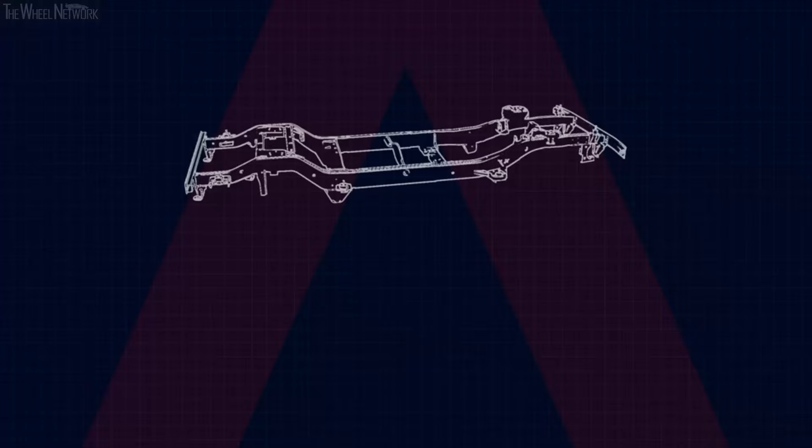Ineos say they're building the Grenadier using a classic 4x4 blueprint, so for them there was only one type of chassis to choose. A ladder frame is the only way to build a proper off-road 4x4. Ladder frames have been the basis for some of the most iconic off-roaders for over 70 years, starting with the Willys Jeep. So you could ask, why would Ineos use anything else?

We are not using a monocoque because we are not building an SUV. Strong, stiff, rugged and reliable, ready for mud, sand, rock and snow, and ideal for attaching extra equipment like heavy-duty underbody protection or winches, and anything else you need in the field. Well, that's the plan.

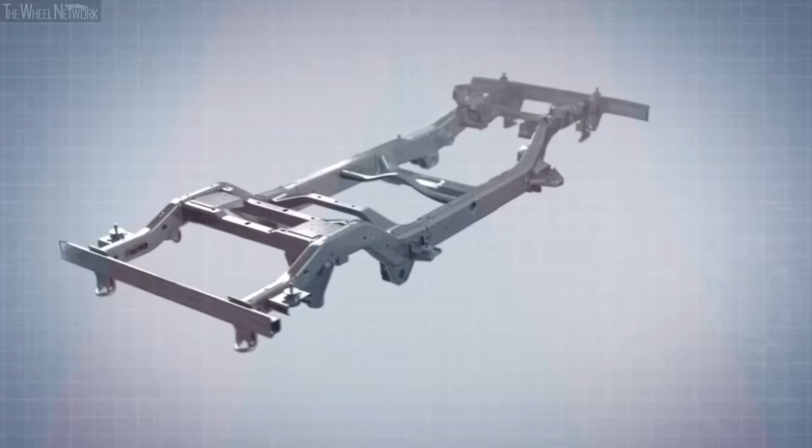Ineos is creating the ladder frame in partnership with a highly experienced vehicle manufacturing company that has a proven pedigree of making ladder frames that can tackle the toughest environments. So the engineers are in no doubt at all: the Grenadier's skeleton will be a box section ladder frame.

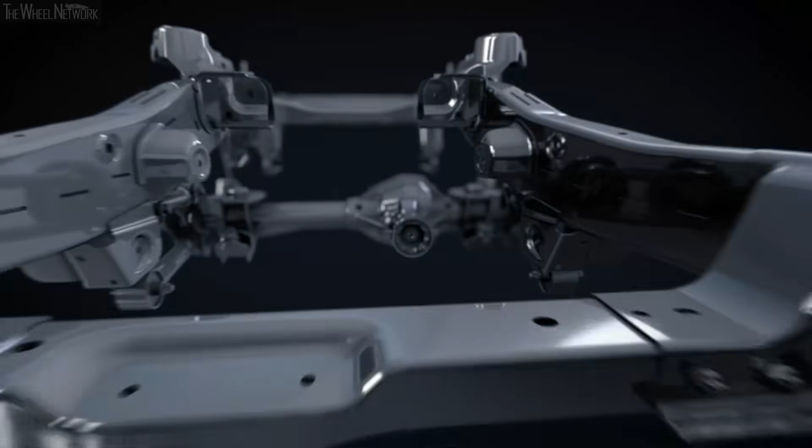Now they'll happily give you a whole load of science and stats to explain why, but for mere mortals like us, the bottom line is absolutely clear: the ladder frame is super strong and a really well-proven 4x4 platform that over decades has helped aid organisations, conservationists, explorers, foresters and of course farmers work harder.

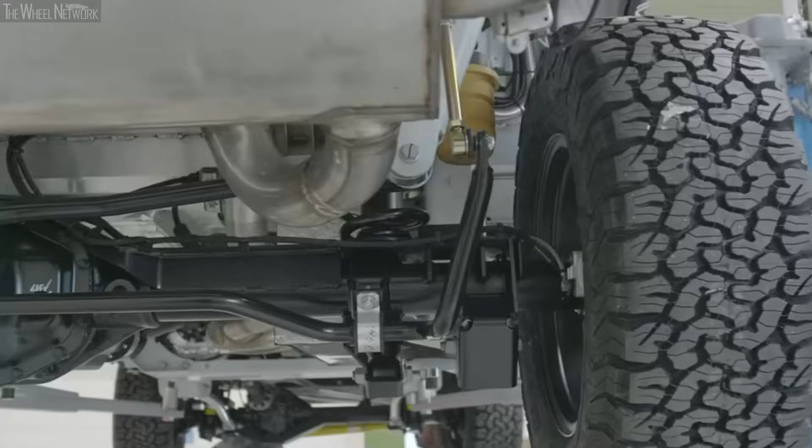For a 4x4 to get the job done, no matter how punishing the conditions, the Grenadier engineers feel that beam axles front and rear are essential. Beam axle is the most robust design we can provide for this vehicle.

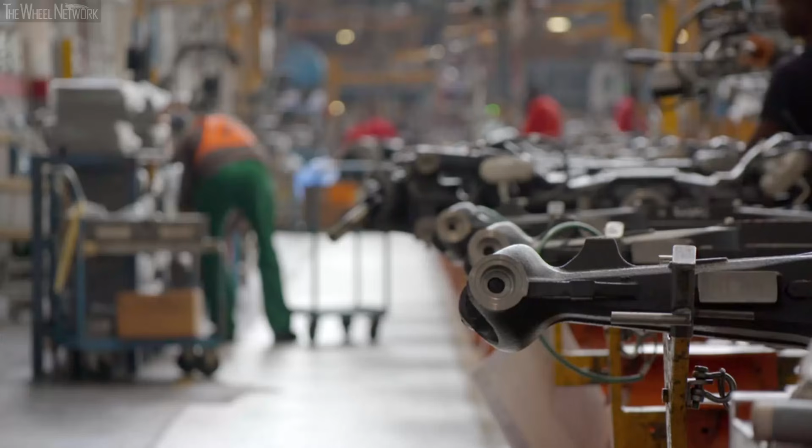Ineos looked long and hard for the right supplier for the Grenadier's axles. They chose Carraro. Why? Because of their long history building tough four-wheel drive vehicles, including tractors, making them the perfect fit for the Grenadier. As you can imagine, there's been a whole lot of debate about whether the Grenadier should have independent suspension or beam axles.

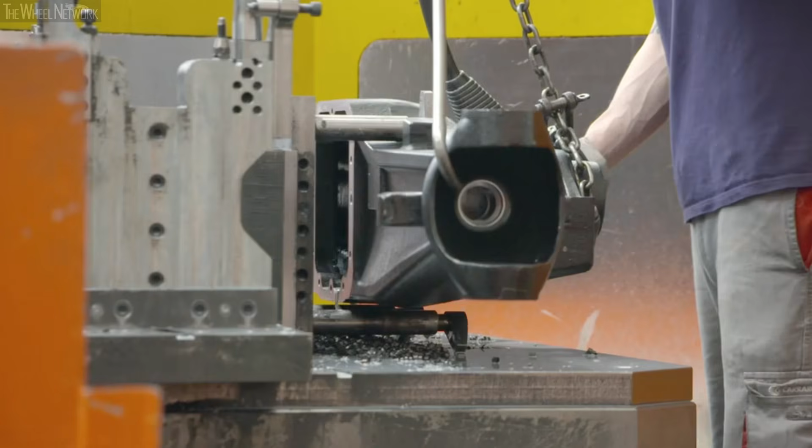Now, both setups, of course, have their pros and cons, but on balance, the engineers have decided that beam axles are going to be more robust, less vulnerable to damage, and ultimately much more likely to keep you going when the going gets tough.

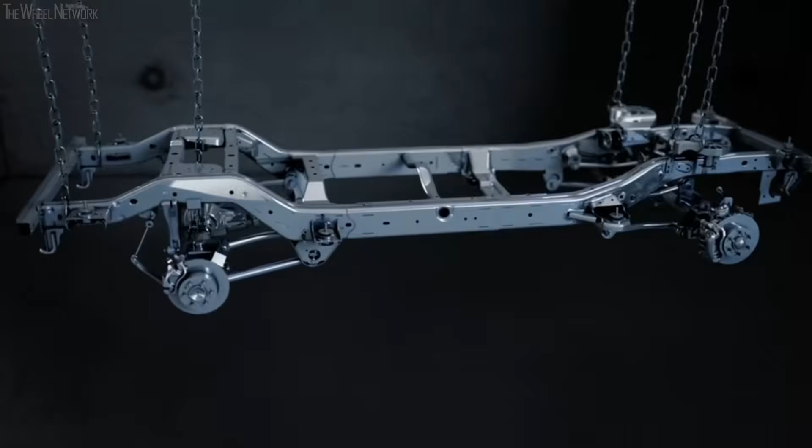Beam axles front and rear and a box section ladder frame - Ineos's vision for a no-compromise foundation to their ultimate 4x4. So the ambition is clear. They're starting with a blank sheet of paper. The Grenadier is being designed and built from the ground up, every component chosen by engineers at the top of their game, and that's got to be very good news.

Join me next time when I'll be trying to find out more about the suspension setup.

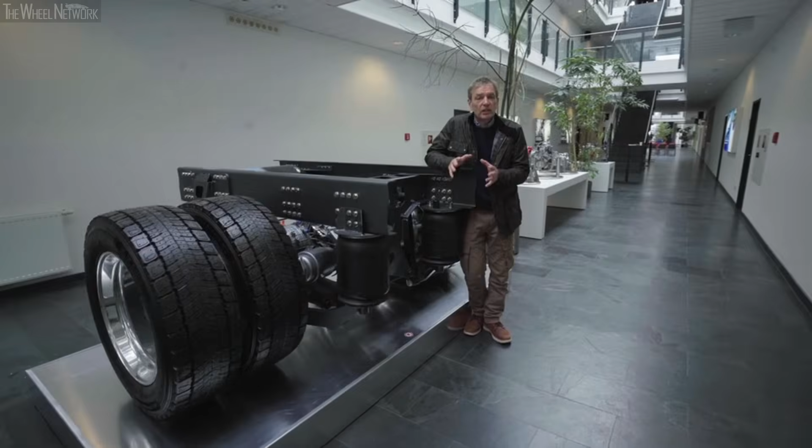The much talked about Ineos Grenadier is on its way, and I'm continuing my journey behind the scenes to find out exactly what the engineers are up to. Ineos has pulled together an international team of specialists to bring the Grenadier to life. There are around 60 companies already involved, and one of the key players is based here in Austria.

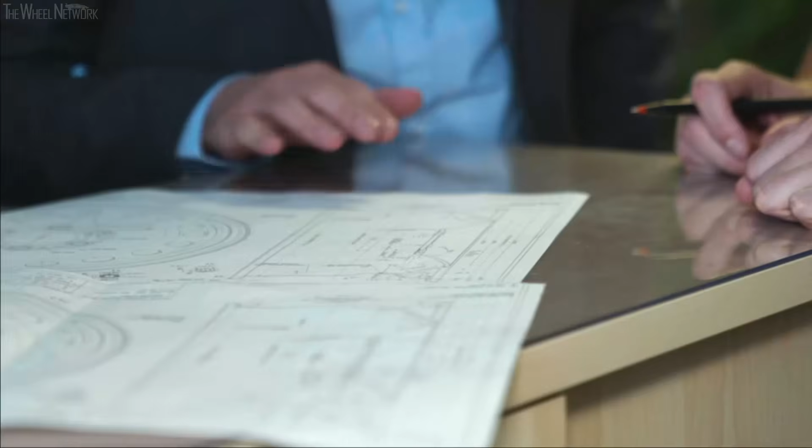Tractors, trucks, 4x4s - Magna has over a century of experience developing and building some of the world's toughest off-road vehicles. A good fit for this ambitious project. It feels like there's a bit of a Grenadier takeover here. There are around 100 engineers working on the project and 15 in this design office, focused on creating a suspension

setup that meets the needs of people who use their 4x4s for work every day. People like Billy Milne, putting in the hard yards, looking after a large estate in the wilds of Scotland. The terrain is tough, punishing, challenging all year round.

So Billy knows exactly what he wants. An ideal 4x4 should be fit for purpose. It should be able to go where you want to put it, and it's got to have a good suspension system that rides through everything that's given. You want something basic, well set up, that does the job.

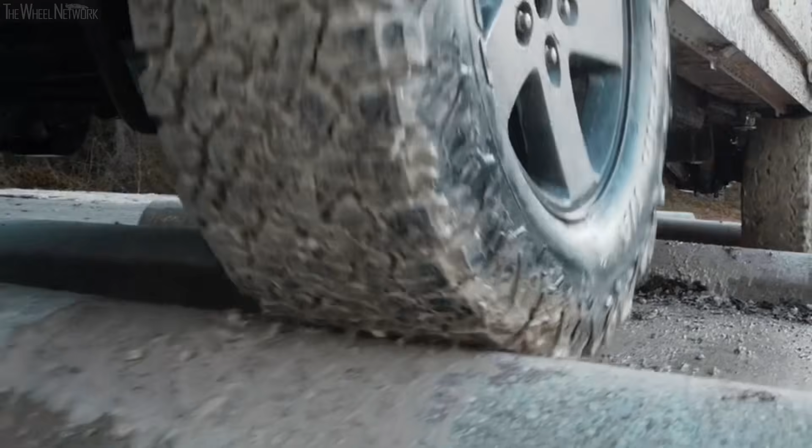So there's a big expectation here: the best possible ground clearance, constant traction, and high axle articulation and suspension travel. So how are the engineers at Magna creating the ultimate 4x4 suspension?

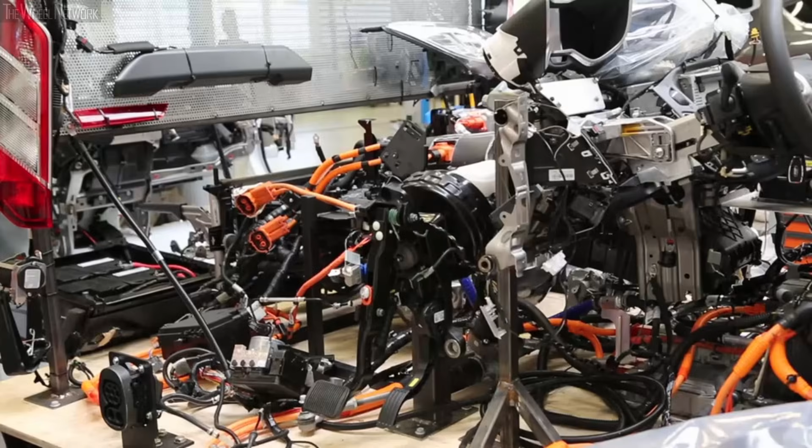By taking apart the world's most renowned off-roaders and benchmarking them, exploring three main options: leaf spring, coil spring, or airbag, then using CAD to develop a theoretical new model that combines the best engineering ingredients to create something even better. Their conclusion? There was only one way to go, it seems: coils and heavy-duty dampers.

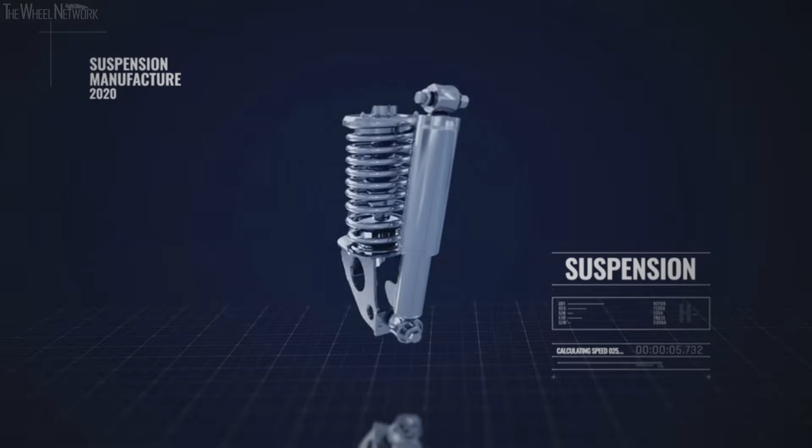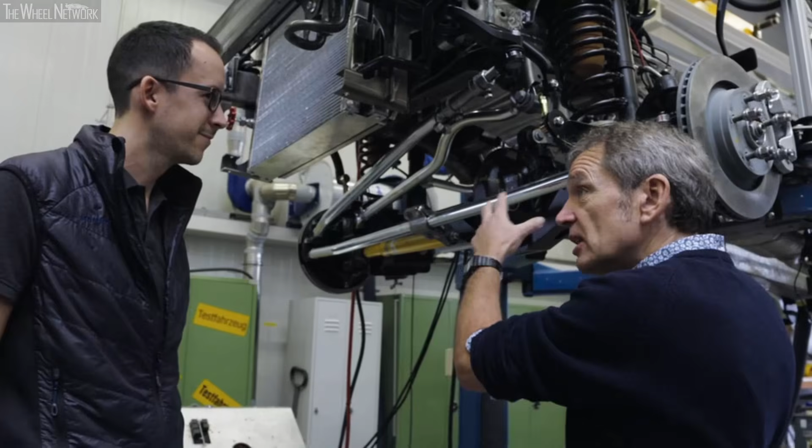I met up with Magna engineer Matthias Mayer to find out more and get an exclusive look inside their top-secret workshop. It's brilliant to see the suspension actually bolted to a chassis, and this is the Grenadier chassis now. It's impressive, really impressive.

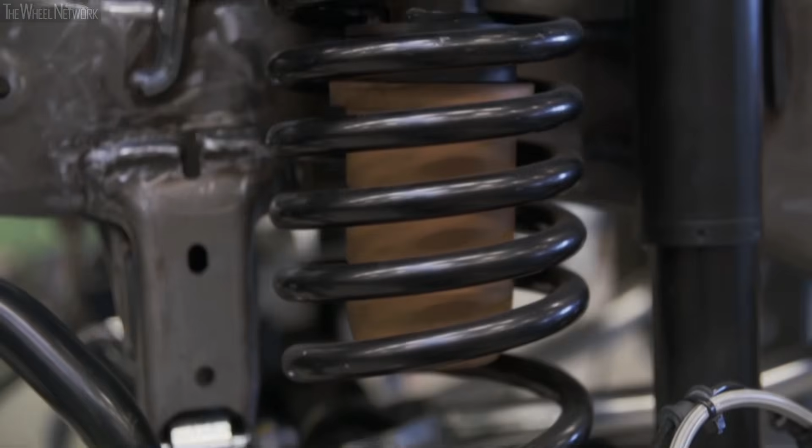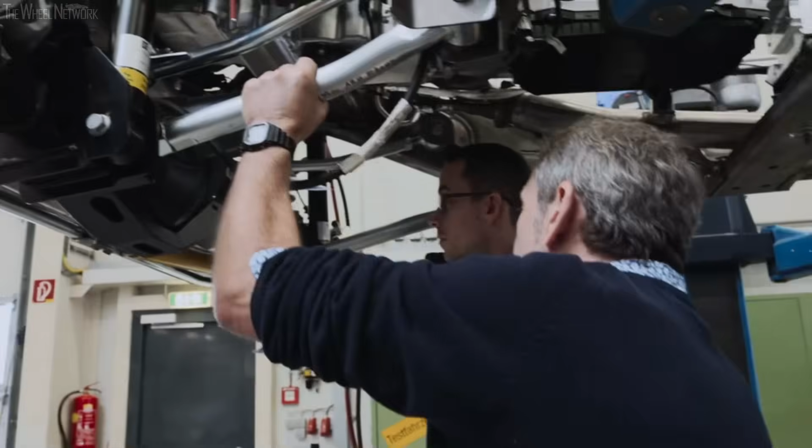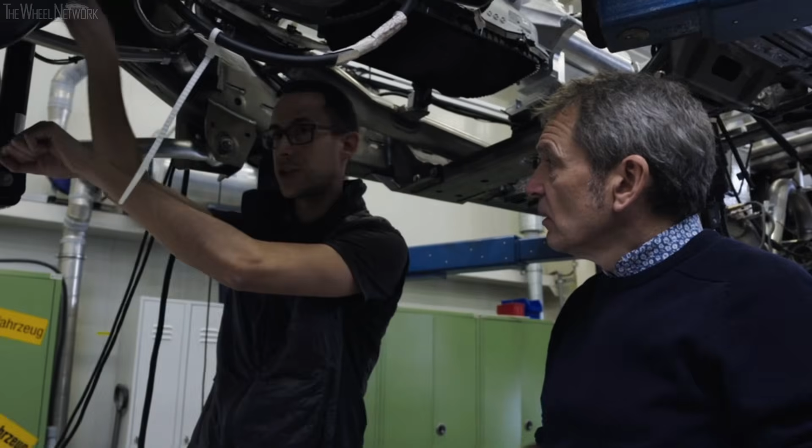You've clearly gone with coil springs here. Why? Coil spring is, in our view, the best option for this vehicle because we can have a progressive spring curve. This means the stiffness of the spring changes depending on the load. Add separate dampers and huge energy-absorbing bump stops, and the engineers believe they've created a unique package. So underneath, two really hefty big bottom links, and then two slightly smaller top links. That's right. This gives stability against rotation in this direction for brake torque and so on, and also good stability during driving.

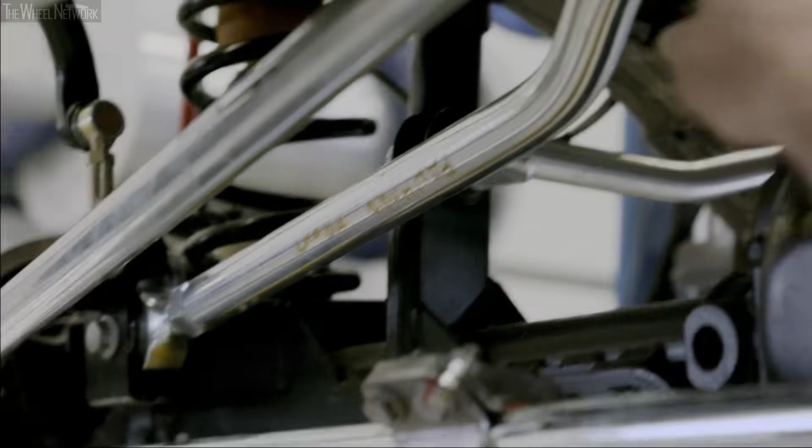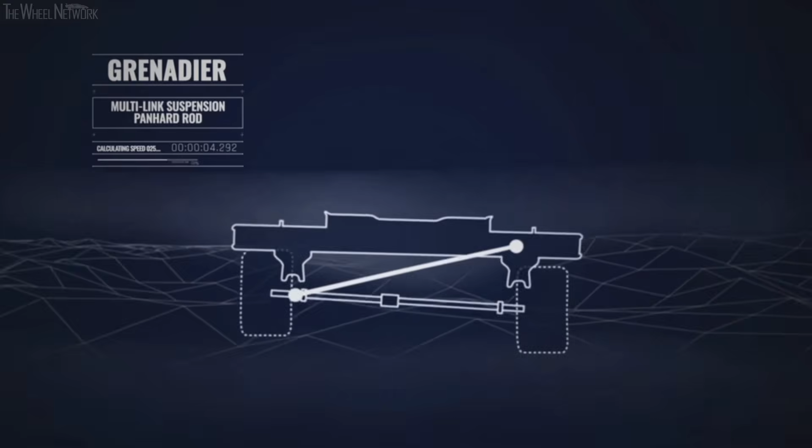These four really strong links help stop the whole axle twisting or moving forwards and backwards. Back in the front then, we've got one link here, the panhard rod. It goes from the chassis over here to the axle, and its purpose is guidance in the lateral direction, to stop the whole axle moving from side to side. It has to be strong because more or less the whole axle load in the lateral direction is guided by this link. So this has to be massive.

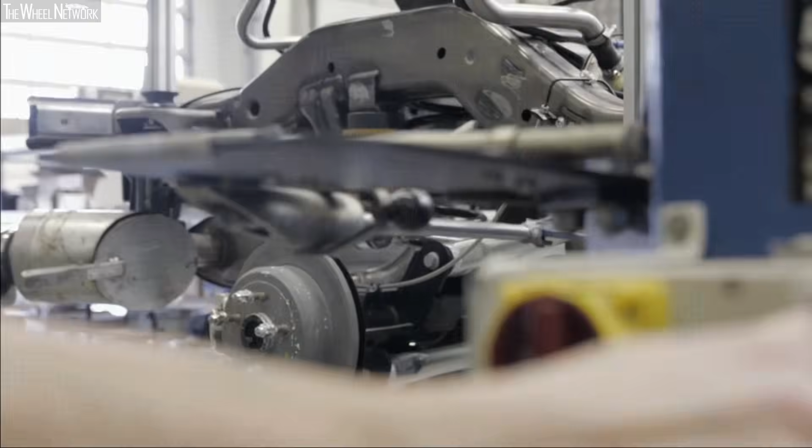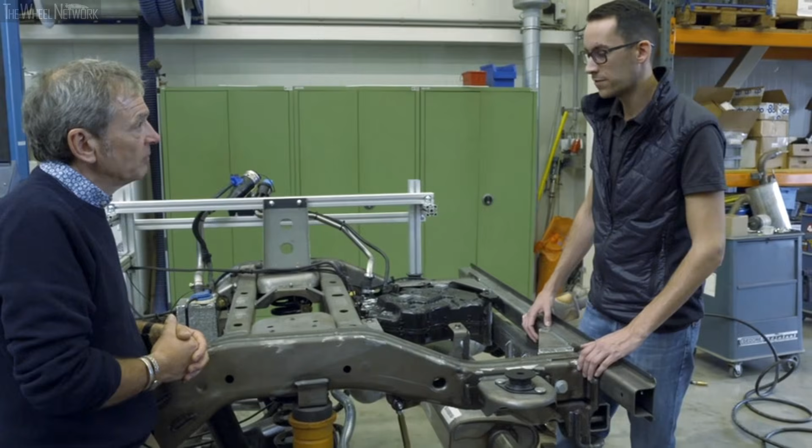And it's the same setup at the back. Where have you got to now in terms of developing the final suspension for Grenadier? We have a great prototype setting now. We have real great ground clearance, very high distortion angles on the axle itself. This enables good traction on every off-road terrain you can think of. And of course we have real high wheel travel, which enables good drivability even in empty condition and also with a trailer on it.

There's no electronic control on this at all, no wires anywhere. Yeah, it's completely free of electric components, to be robust, easy to maintain, and also to have easy access to all parts.

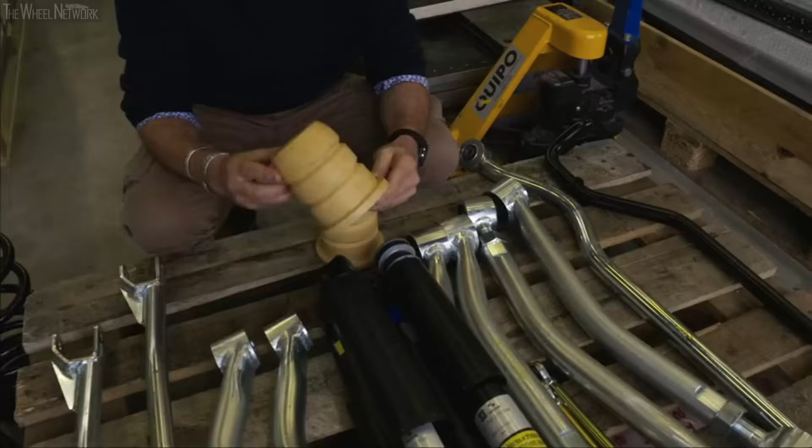After months of only being able to look at computer-generated models of the suspension, it is so cool to finally be able to touch some real parts. But these are prototypes, of course. There's a whole heap of testing and fine-tuning to go. There's a bloke in Scotland I know who will be desperate to get his hands on this stuff and show it a bit of good old-fashioned Highland hospitality.

Hopefully they will get it right. And if they listen to the people out there that are working the ground, working the land, and need a good rugged 4x4, I hope they get it right.

I hear you, Billy. Clearly building a rugged 4x4 is a huge challenge, but getting it right is exactly what Ineos are focusing on. That's why they've got the best people working on it, and I have to say, their confidence is impressive. I promised you exclusive access behind closed doors. Well, there you go, you're the only people who've seen that. That's it for episode 2 of Building the Grenadier. Join me next time to find out more about the engineering of this radical new 4x4.

I catch up remotely with some of Ineos Automotive's senior management team to find out how they're handling the coronavirus challenge.

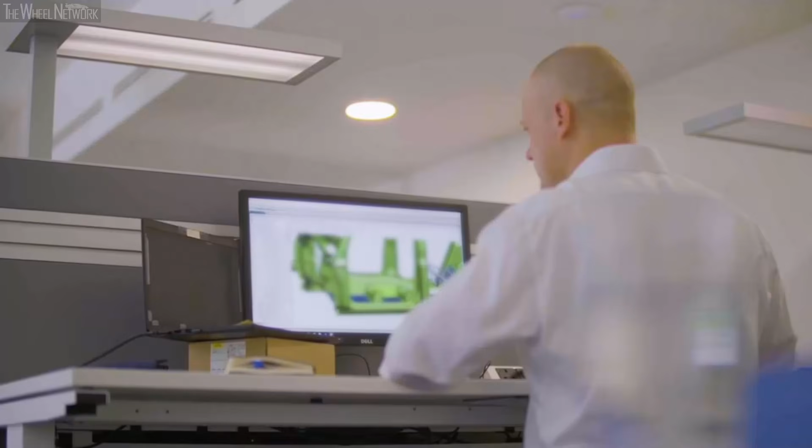Can you give me any examples of where it's been tricky? Every shape that's created on the front or the rear of the vehicle must respect the approach and departure angle. Otherwise, as you quite rightly said, people will not see this as fit for function.

Essentially, the Grenadier's base is going to be in Wales. Why Wales? Well, we wanted to be able to create our own identity. What we wanted to do was have our own facility. We didn't want to take somebody else's. We wanted to create something specific.

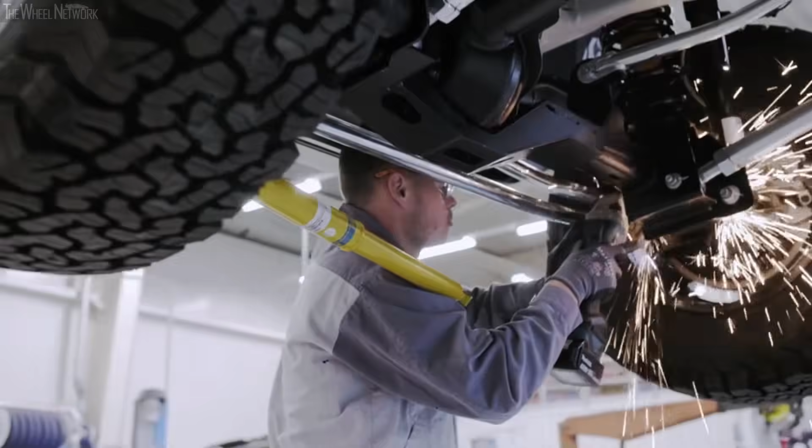Oliver, it's great to see you. What are the really big challenges to conquer from your point of view? You have the digital engineering done, but now you have to actually put it in the physical world, and this is ahead of us. Dirk, thank you very much for finding some time to speak to me.

I know you're a very busy man. So what stage are we at now? Coming out of COVID, coming out of that crisis, we have lost some time here and we need to make it up. We are not jeopardizing the quality, so we need to find ways of testing very hard, very rigorously.

Welcome to a very special edition of Building the Grenadier. After all the talk, all the speculation and all the planning, Ineos Automotive is finally prepared to let us see the exterior of their all-new 4x4. So, here you go.

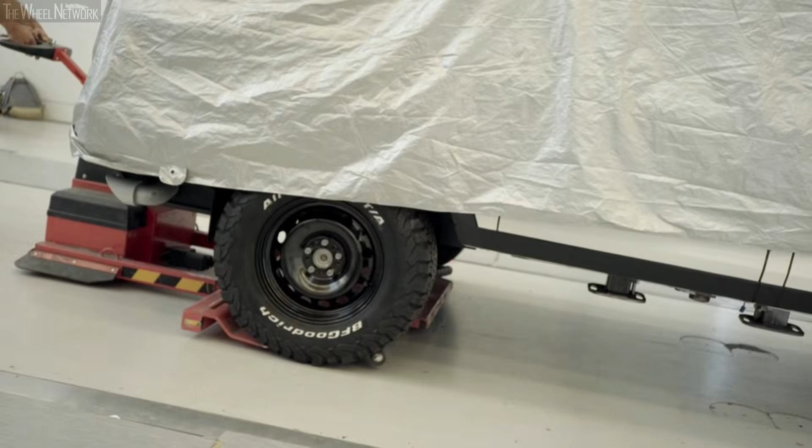Revealing the finished look of the car so early in its development, most manufacturers wouldn't dare do that. I think because we're not really restrained in the way that a big manufacturer would. We don't have to protect an ongoing line of vehicles. The view is that we just need to be really open about it. We'd much rather get the actual car out there, test it. Like to be nice and open.

Why wouldn't you be? The story about a pub in London, the Grenadier, a bunch of blokes having a few beers and coming up with this plan to build the ultimate off-roader - is that really what happened, or was it a much more conventional brief? It pretty much was exactly that.

It seemed that the sort of last of the proper utility vehicles were about to stop. There was a character about them that we all kind of felt we were going to miss, and you look around and there was nothing that was really very appealing, and Jim being Jim, let's do something about it. As we basically worked out what it was about the character of these older vehicles, what was the DNA that gave it that character, and as we understood more, you start to see why these vehicles start to look in the way that they do. We didn't set out to make it look like anything else. It was always sort of engineering led.

Function always wins. Where did your influences come from in the way you creatively thought about the design? Right at the beginning, I remember saying, we've got to design something super practical, really well built. If we can think of it in these terms now, all the rest of it gets kind of built onto there.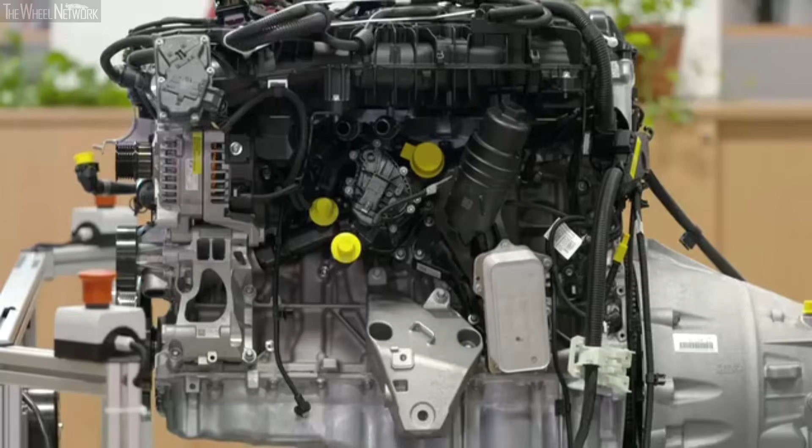In the last episode, you got to see what the Grenadier will eventually look like. Well, now's your chance to hear it and to see it undergoing some of its preliminary testing. I'm back in Austria to catch up with the engineers responsible for developing and testing the Grenadier's powertrain. And that is actually a lot steeper than it looks.

Early prototype Grenadiers called 2As are being used to specially calibrate petrol and diesel variants of the same BMW 3-litre 6-cylinder engine. The tuning and testing programme is being led by engineer George Fuchs.

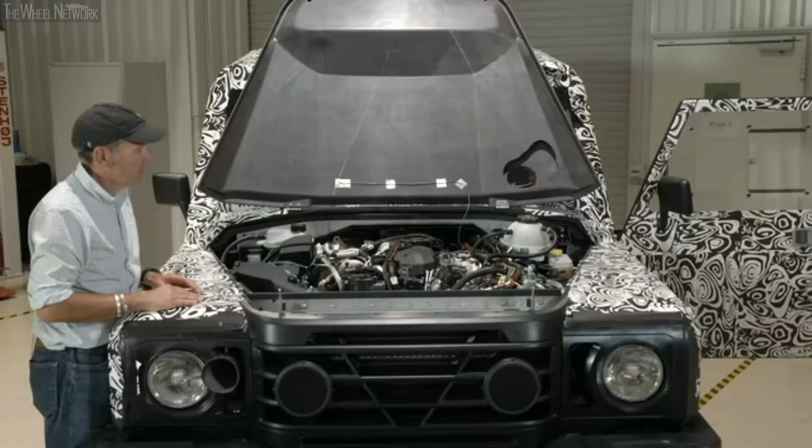That's cool, it sounds really smooth though. So the two engine options are going to be what, just to clarify? Here you can see the diesel version, and before on the test track you have seen the petrol version. Both are 3-litre versions with 6 straight cylinders.

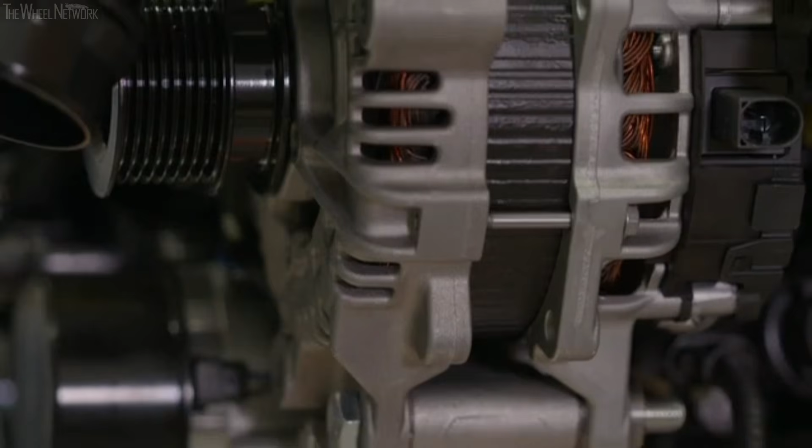Why take an existing engine that's being used for a different purpose off the shelf and modify it, rather than just build a brand new engine from scratch? We know we can count on the BMW one. We fulfill all emission standards on every market. We know we can adapt this engine for the use of the Grenadier project. The most important thing is to have a high amount of torque at low engine revs. We need a robust engine, and we need an engine we can count on, because we need to be flexible and have a high amount of torque and power, to be able to bring up the vehicle, also with a trailer, for example, up the hill.

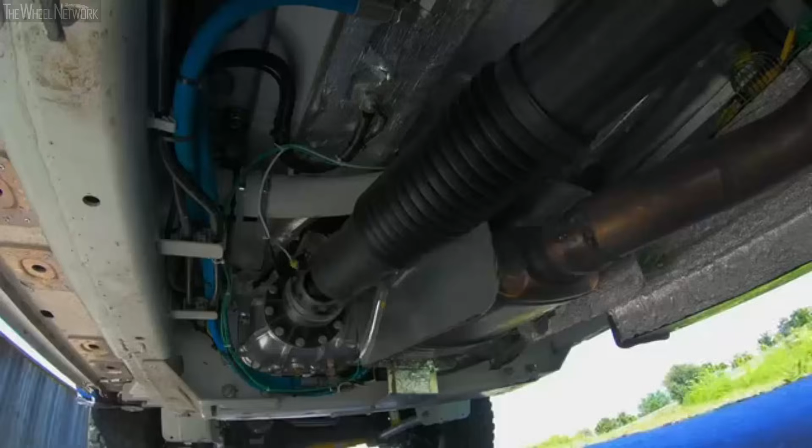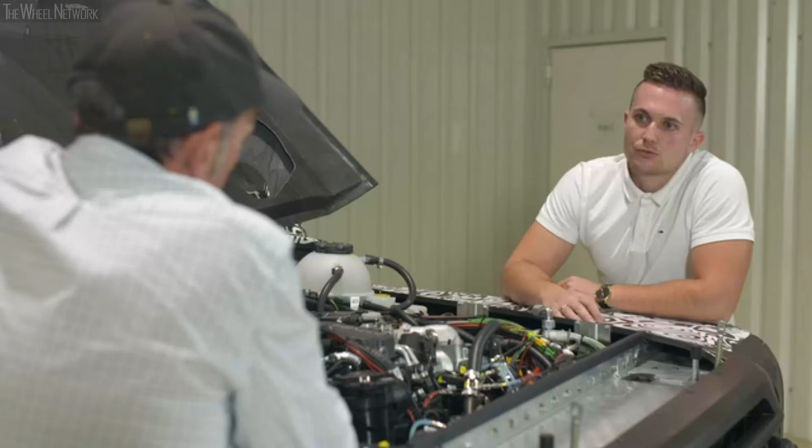How hard is it retuning, recalibrating either a diesel or petrol version of this to make it the right engine for Grenadier? We need 2 to 3 years of calibration activities. So we have several loops, winter testing, several loops in hot climate testing, emission testing and so on.

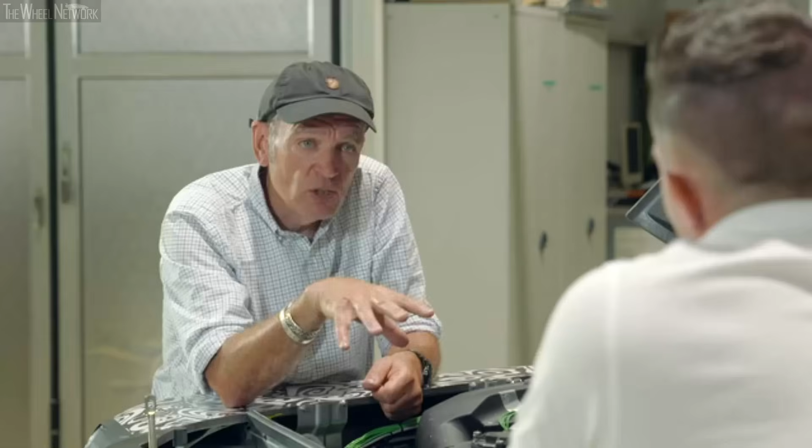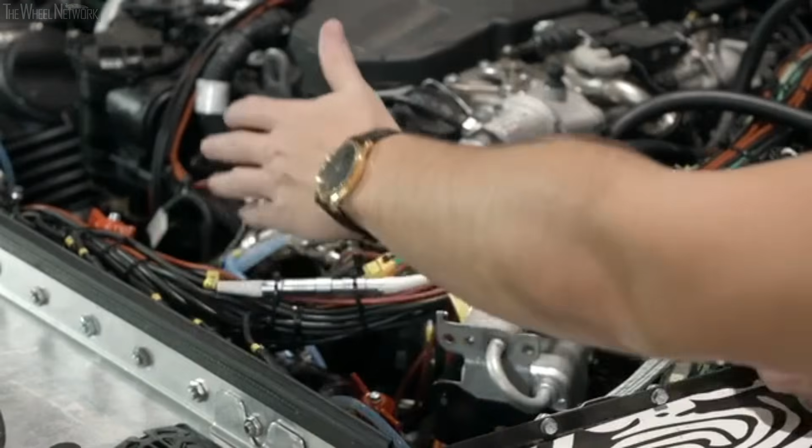So in terms of calibration then, what are you actually fiddling with and changing? It's a mix of all components which are relevant for the engine, the air intake system, cooling temperature, fuel supply, the exhaust system. Here you can see in front, these are approximately 12 pressure sensors which are measuring the pressure in the fuel supply, in the cooling system and so on.

So you guys have already done extensive testing, 18 months or so. How much more have you got to do? Approximately 1 year is left, and in total we will travel 1.8 million kilometers. That's a lot of testing. Yeah.

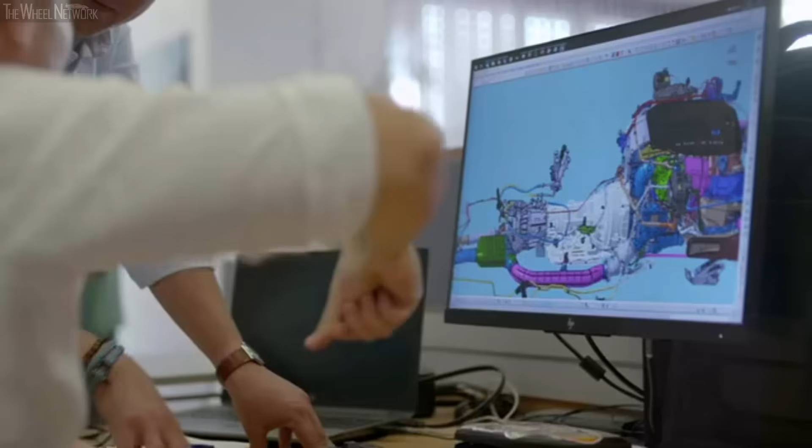Ineos Automotive is working with off-road engineering giant Magna to develop not only the Grenadier's engine options but also its heavy-duty transmission. Its facilities here in Austria are world-renowned. The gearbox programme is being led by Ineos engineer Joop Zwollo.

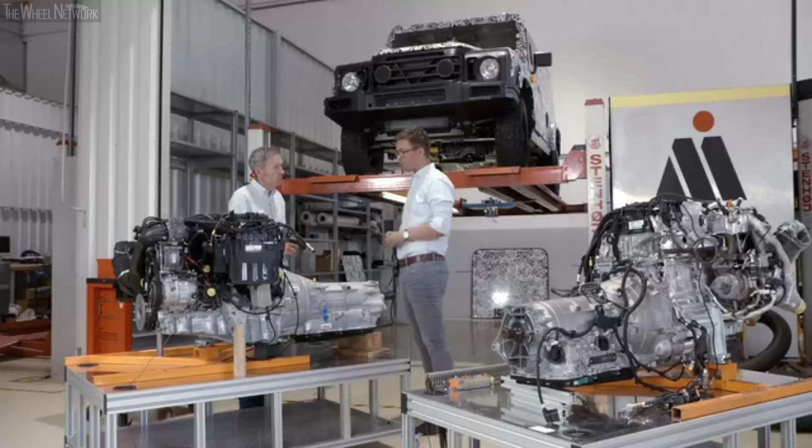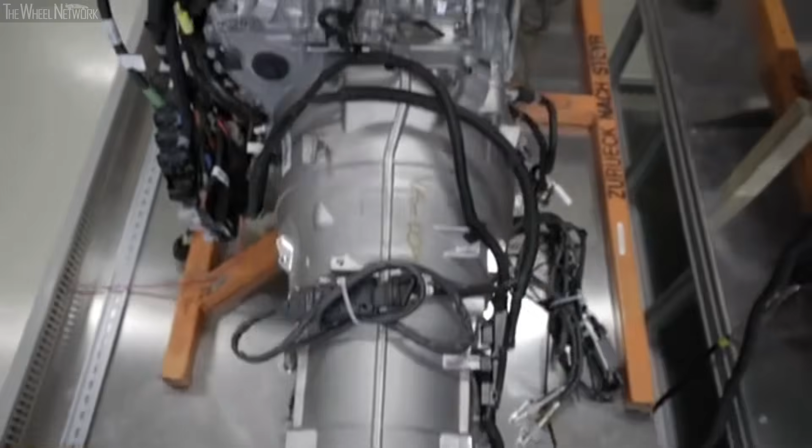I'm keen to find out firsthand how things are going, and there's a burning question that needs a straight answer. Will there be a manual option? No. Why not? We've reviewed all the options and we believe that the Auto is the best option. It offers the full suite of functionality for the experienced drivers but also for the inexperienced drivers. These are both a ZF 8HP, 8-speed automatic transmission with torque converter, fully electronic control, best in class, definitely.

And in terms of the features in it that make it better for off-road use, for the kind of customers who are going to end up driving these vehicles? Oh, definitely. It has a torque converter which prevents stall, increases torque. There's a manual mode for the enthusiasts to select their gear and keep that gear, or keep it in drive for the inexperienced drivers.

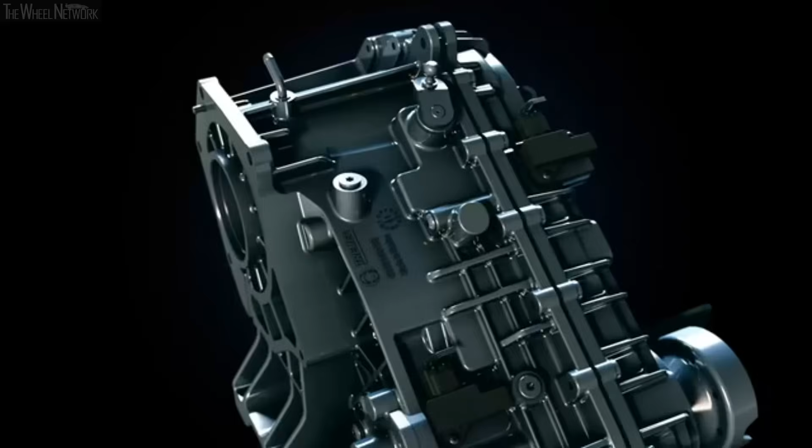So the transfer case, this has been a big part of the powertrain development for Grenadier, hasn't it? Yes, it's massive. We've developed a transfer case from a blank sheet of paper. Why was that so important for this project? This is the part that makes this car a 4x4. If you don't have the transfer case right, then your off-road performance will be not as good as it should be. We are targeting to be best in class, so the transfer case needs to be that too.

So what essentially is unique about the transfer case? The fact that it's permanent 4x4. There's not many manufacturers doing that. Most of them choose to go for a permanent rear-wheel drive and then have the user select the 4x4. We've deliberately decided not to do so. We want to offer our customers this experience, understand also you're driving on the road, you decide to make a detour through the country or whatever, the countryside. There's no complex switches and buttons to be used, or you need to stop to put it in 4x4. You just take the corner and you've got drive on all 4 wheels.

In terms of operation though, this is a manual selection, yes. High and low range. Correct, so it's manually high and low range and manually diff lock. That was a deliberate decision again. The manual shifting system is rugged, it's durable, and it's also very well serviceable in the field.

Where are you with the current development? We're building 100 plus full vehicle prototypes. So we've moved from component testing into system testing, and now we're going to do full vehicle testing. So for the next coming year and more, there's going to be a whole bunch of cars running around the whole world. That means cars doing calibration on every aspect of the car. Transmission, engine, brakes, ESP, ABS, everything.

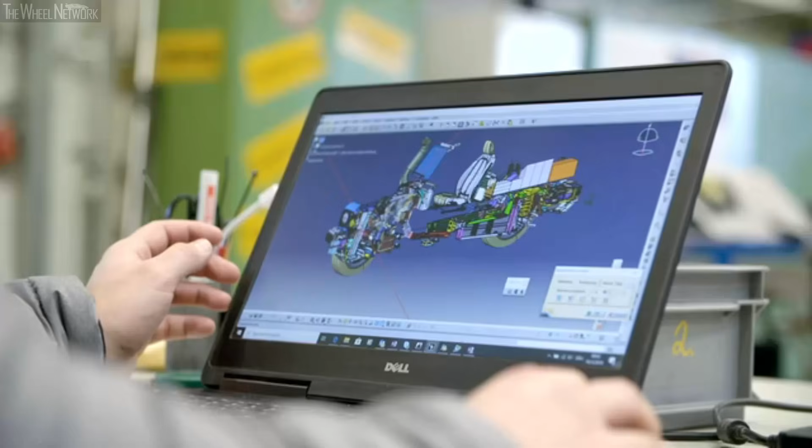How does that feel for the engineering team at Ineos? It's Christmas. It is, because you've been working on virtual components on a computer screen for every engineer. That's a magic moment. But also a new phase in the program, because now you're going to put these components through their paces. It's going to be an exciting period.

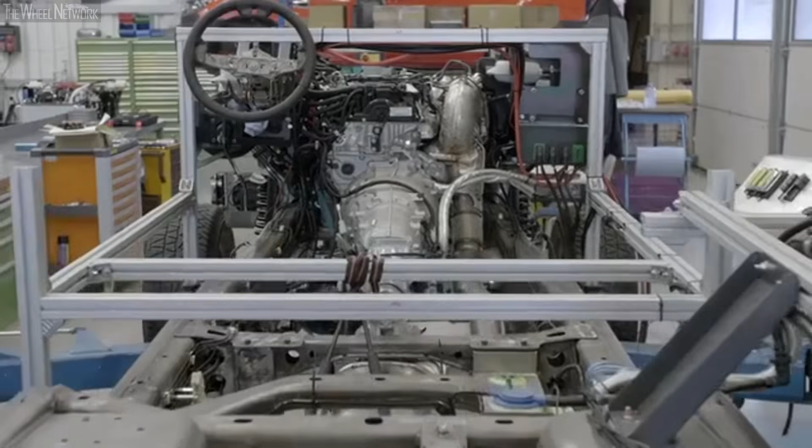So, to recap, the Grenadier will launch with diesel and petrol options of the same proven 3-litre straight-six engine, hooked up to variants of a best-in-class 8-speed auto gearbox with driver override. The transfer case, being developed from scratch, promises full manual control.

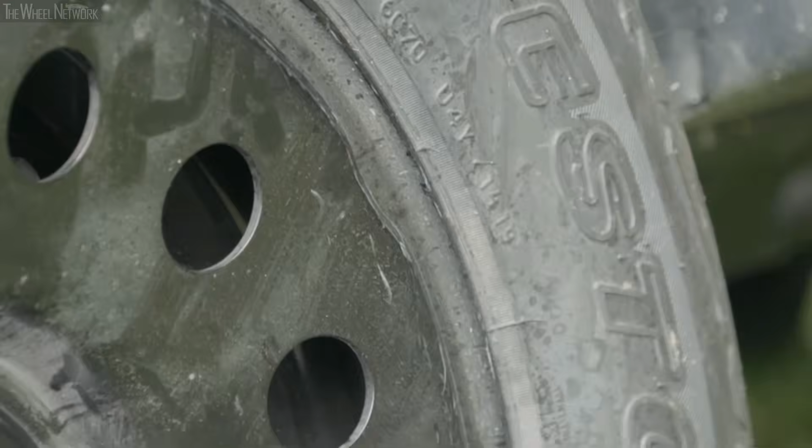So we started the selection process more than a year ago with some tests on our first prototypes, and after the evaluation of these tests we nominated Bridgestone as a capable but also a very willing supplier. The Grenadier will come with tailor-made Bridgestone tyres as standard. Ineos believes Bridgestone is the perfect tyre partner. The company has nearly a century of experience, plus the necessary global network to support a 4x4 built for the world's most remote places.

So tyre options, there will be, for people who want something more aggressive, an option for a BF Goodrich tyre. The standard tyre is the one that you, Andy, at Bridgestone are developing, which is this. Now this is a demo tyre. Yep, it's because you walk up and go, it's a little bit small, but it demonstrates actually the tread pattern.

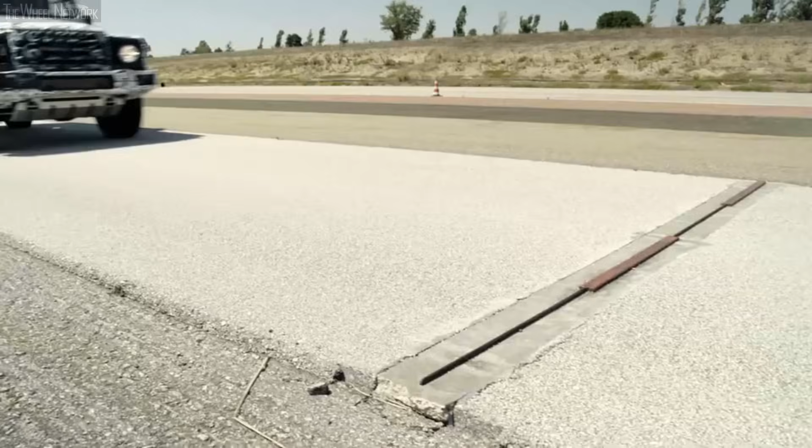So you're saying that you've got a tyre you've already developed, it's been proven, it's been tested. Absolutely. But you're then kind of up-speccing it specifically for the Grenadier. Absolutely. So we've changed the compound initially so that it's got better off-road performance, particularly in the snow, and also we've changed the construction slightly to make it more tuned, and this particularly helps with the steering in unladen and fully laden conditions with a trailer.

Lots of people, when buying cars, there's kind of a perception that standard means second best. That's not the case here, is it? Absolutely not. So we've worked really hard with the Grenadier team to make sure that what is offered as standard fitment is absolutely what is required for the vast majority of people running the Grenadier. So the package we've put together with the wheel and the tyre is suitable, it's snowflake marked, so it performs as well in the snow as it does in the mud, and it has great on-road capability as well.

So let's just focus on the rims. From a materials point of view, is the reason you've gone for steel as the standard as obvious as you might expect, that it's incredibly robust and you can beat it with a hammer if you bend it? It has to be robust for a car, but also durable, and steel wheels would be perfect for use in winter and also for hard road conditions.

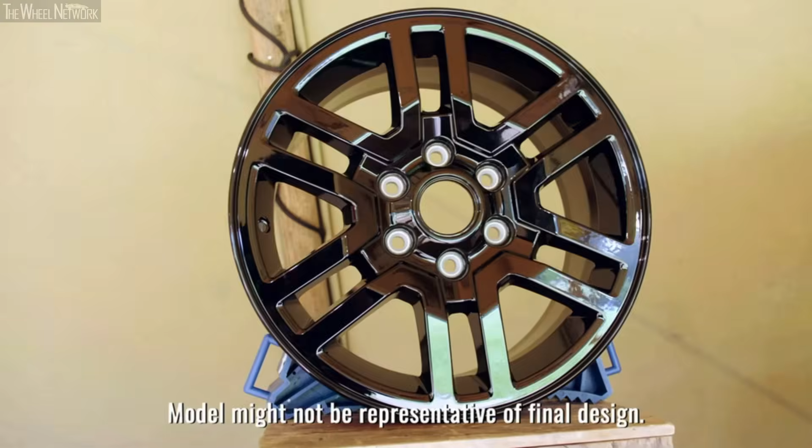From a sizing point of view, you've gone for 17-inch and 18-inch diameter rims. Why not 16? In terms of brakes, we had to respect a specific package to perform as expected, and clearly the 16 didn't fit for our brake system, so that's why we didn't go with 16 inches. Wheel options will be larger 18-inch steels or unique alloys in both sizes, all fitted with the Bridgestone tyres.

All right, what's been your general feeling? It's just like ticking boxes, good engine, reliability, tech, automatic gearbox, reliability, tech, transmission, it's all there, all the axles. The way the body's built, put together, the big doors at the back, it's all there. You see it on all the social media posts, the previous videos, you've seen all of that. We've all watched them, but actually to come here and see it, and to measure up against what we were expecting, it's very much a very exciting project, and I can't wait to see this thing out on the road.

When you're trying to make a vehicle like this, the ultimate off-roader that's going to be used in incredibly varied conditions, in the automotive world, that's a hell of a thing to try and create, a vehicle that's capable of doing all that. Do you get the sense this is a compromise? No. This is the vehicle you want for the next 20 years.

You're just trying to make your vehicle as reliable as it is, because there's nothing else out there at the moment to replace it. We keep utilising older and older vehicles because there's nothing there that I feel can replace what I've got at the moment.

Coming to have a look at this, it's looking pretty good, to be honest. It's nice that standard is on steels though. Car manufacturers constantly are pushing alloys to you, but a steel wheel's fantastic, it does what it says on the tin. That's what a lot of people are going to want out of this. How many of you have bashed out a bent steel wheel with a big hammer? Yeah, a few times, sitting there with a sledgehammer smashing it back on, putting it straight. Oh yeah, it's a little bit buckled, but it'll be all right, blow it up and off you go again. But it works, doesn't it? It works every time, and it gets you home. Exactly, it'll always get you home.

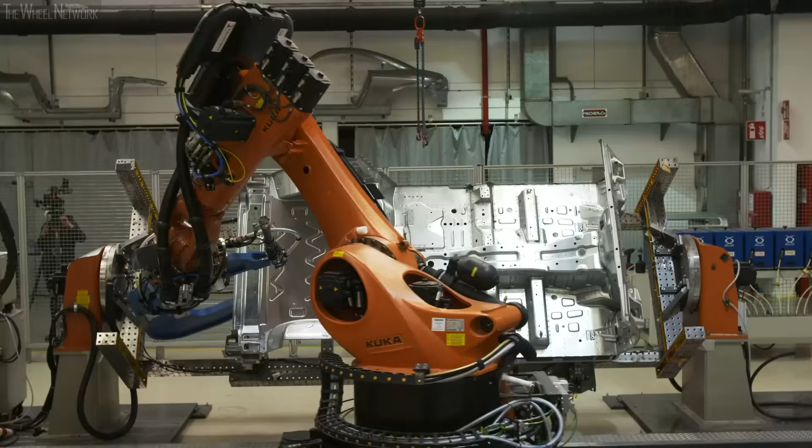So things are really ramping up now. In this episode, I want to take you behind the scenes of the new prototype production line in Austria, and a first look inside the factory where your Grenadier will be built.

After more than a year testing early development vehicles, they call the 2As, the Grenadier project has reached a major milestone. Ineos Automotive's engineering partner in Austria is now building a fleet of much more advanced next-generation prototypes. You guessed it, the 2Bs.

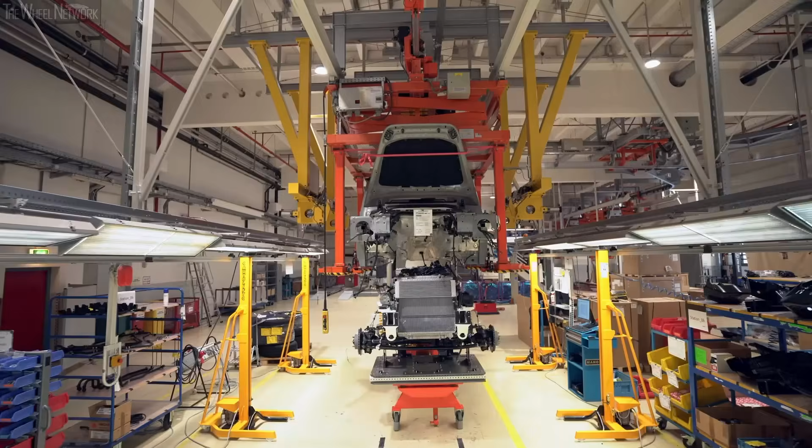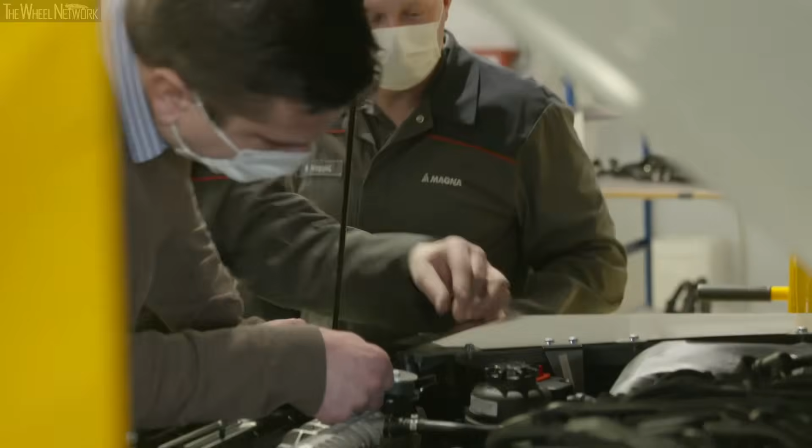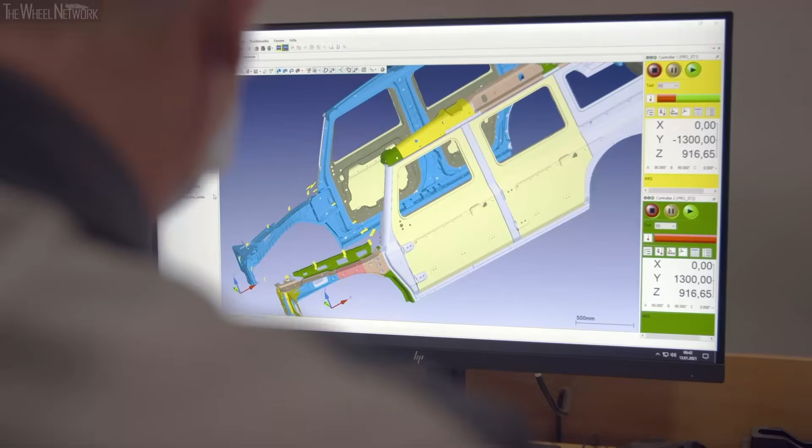Hans-Peter Pessler is the engineer in charge. We have around 250 engineers working on this project, so everybody is pushing forward very hard because it's a big challenge. You've got loads of experience in the automotive industry, building cars for all kinds of big companies. What have been the real challenges that Grenadier's thrown at you? The first challenge was to understand what Ineos wants to have, so to get their ideas onto paper, into the sketches, into the computer, and then finally into this car. We are very happy that we have these 2A vehicles right now, and the next big phase is the 2B. And how many? Round about, let's say, 80 plus.

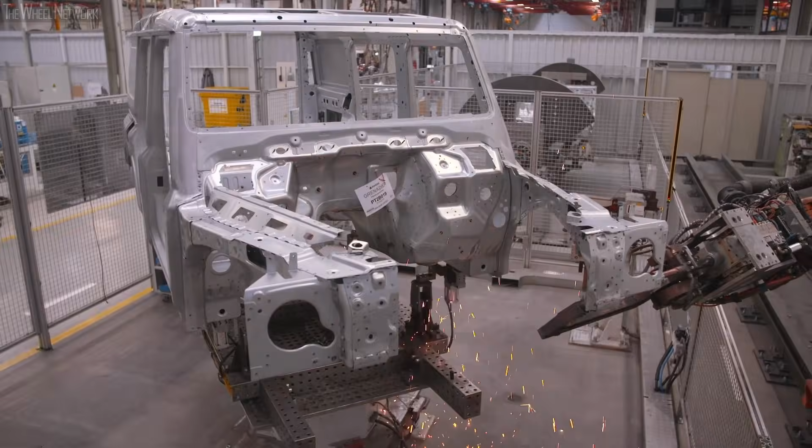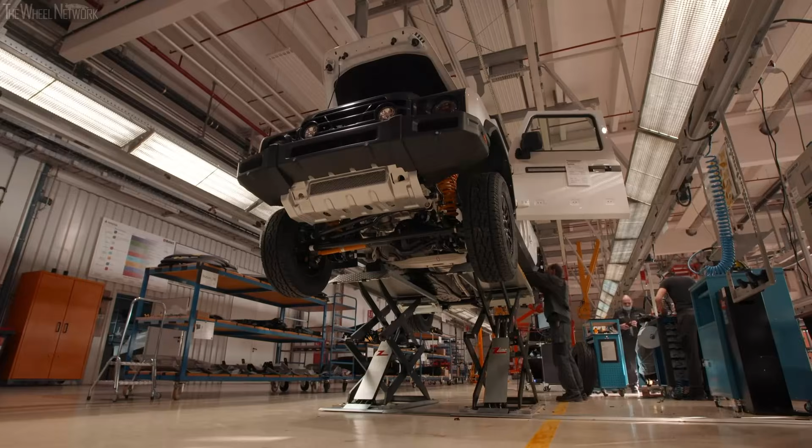Welcome to the Grenadier's first small-scale production line. It's been created not just to build the limited run of new prototypes, but also to test and perfect every stage of the process, from start to finish. Experience gained here is helping the team plan the path to mass production.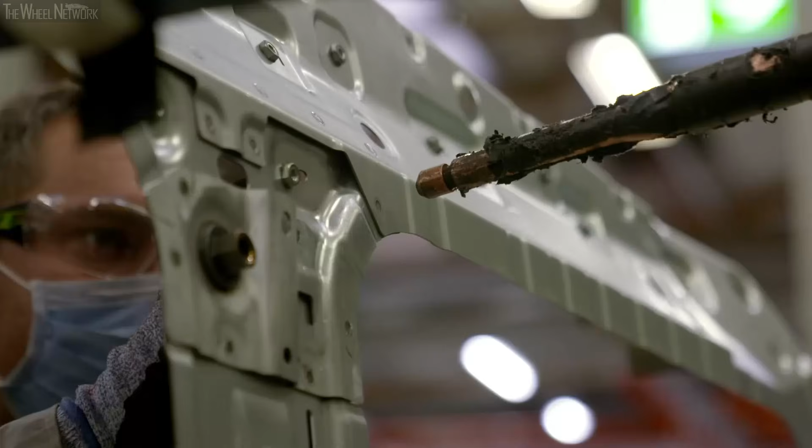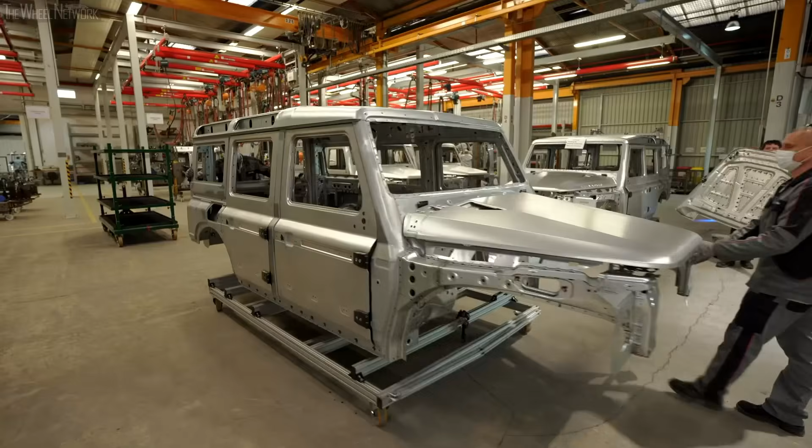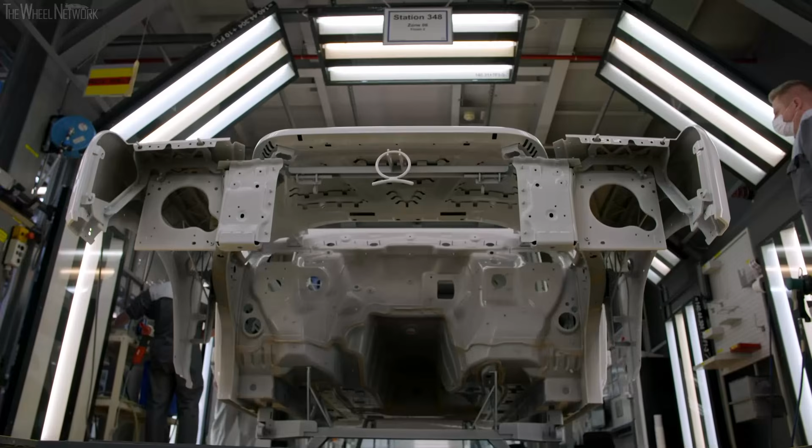Each Grenadier is built from around 350 individual panels, a complex 3D jigsaw held together by glue and weld. The doors and closures are aluminium, the rest of the body is galvanised steel. The shells are protected with 4 coats of paint applied in a 7-stage process. Most will be white, black or silver, with a few having contrasting roofs.

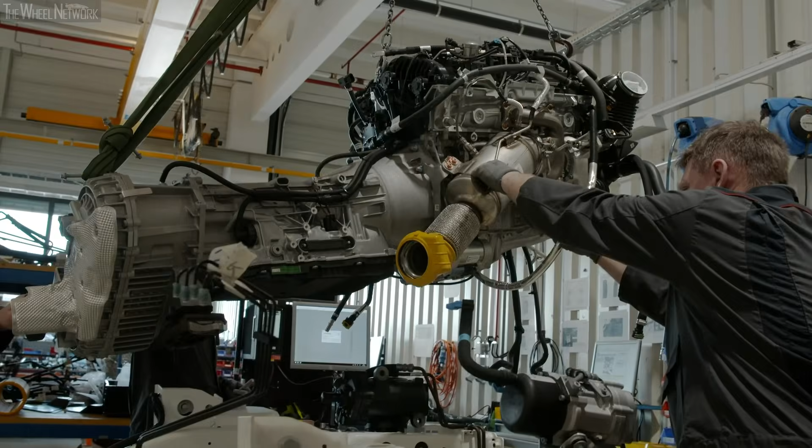All the chassis are powder-coated white to help detect cracks during testing. Axles and powertrains are supplied pre-assembled, the majority left-hand drive.

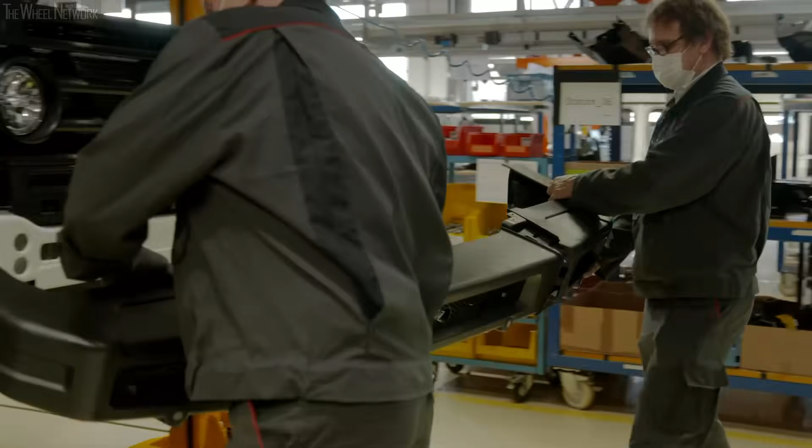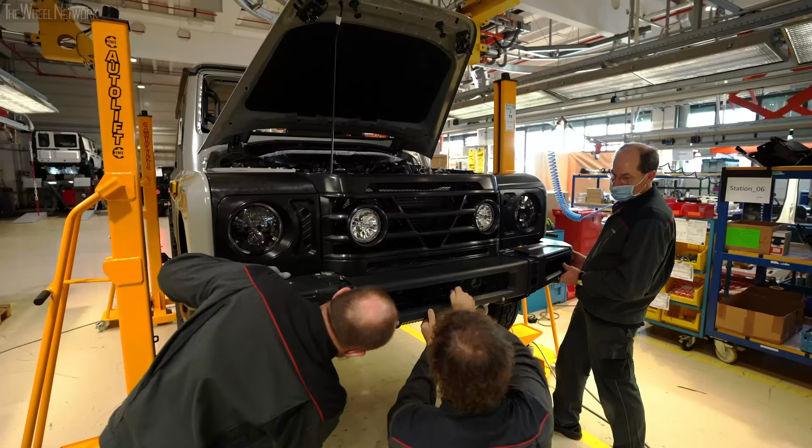It takes just over a month to build each prototype from scratch, but there are 8 vehicles in build at any one time. When they leave here, these 2B prototypes will be put through extensive safety and performance testing. Some are destined for high-tech automotive science laboratories, others will be shipped around the world to see if nature can break them. Lessons will be learned, of course, and the Grenadier will continue to evolve over the coming months.

Yes, it definitely looks the part. Now the engineers must prove it can get the job done.

Now, as you may know, Ineos Automotive has bought a manufacturing site in Hambach, and it will be the home of the Grenadier. So I thought you might like to take a closer look.

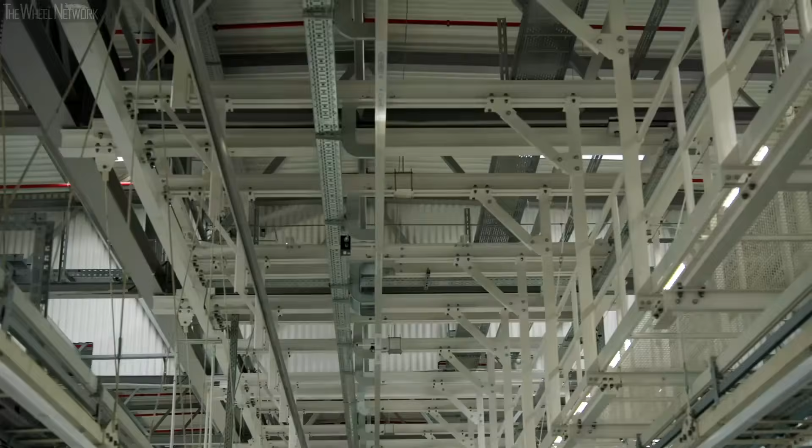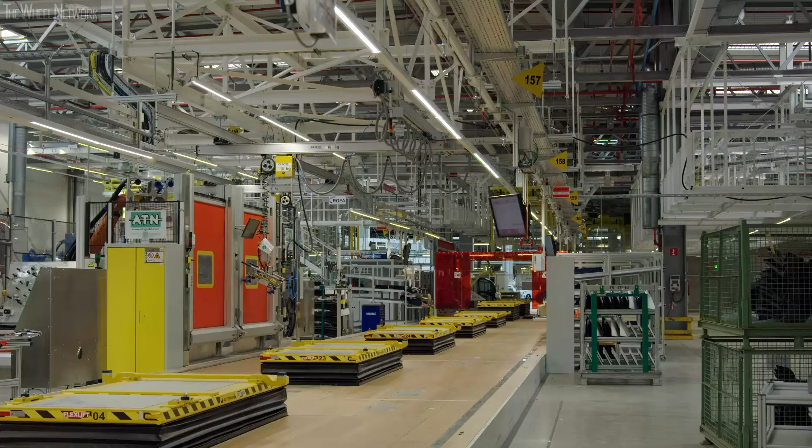It's a massive facility, one of the most advanced vehicle assembly plants anywhere in the world, thanks to the 500 million euros invested in it by Mercedes-Benz. Packed with state-of-the-art technology, it comes with a highly skilled team, all trained to Mercedes' exacting standards. The fully fitted factory just needs repurposing and reprogramming to build Grenadiers.

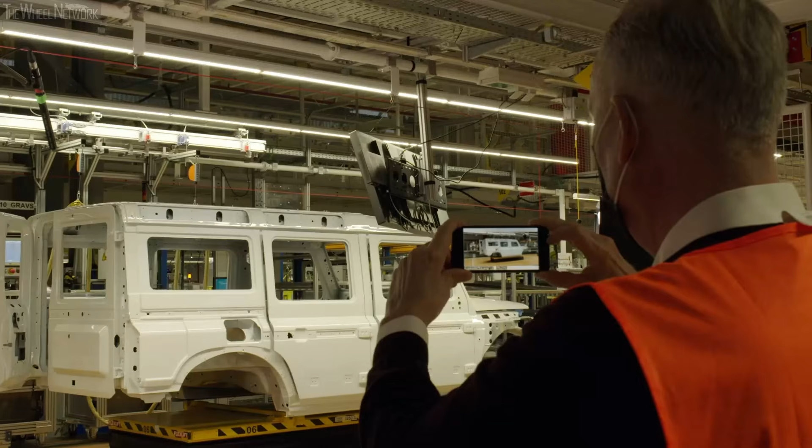And this is the man getting the job done. Obviously, Eric, there's been a lot of discussion about where Grenadier's factory will be. Why did you end up in Hambach? We looked at several sites throughout Europe, and then this was a unique opportunity where Mercedes had a change of strategy that coincided with us looking for a plant.

And the blessing here was that Mercedes has actually designed this plant for full-size SUVs. So very much a commercial opportunity then that you simply couldn't turn down?

It's not only commercial, I would say, it's a whole package. It's production cost, but it's also quality and capacity.

So what have you actually got to do to get the facility ready for Grenadier? You can say that you have maybe 3 categories of work that needs to be done there. We have some cells where we just need to change some fixtures, need to reprogram the robots and so on. And we have some cells that need to be rearranged — these are modular cells, so maybe some robot needs to be moved from one place to another. And then you have the 3rd category where we actually tear the whole cell down, and then we rebuild it. All of that is done in the body shop here behind me.

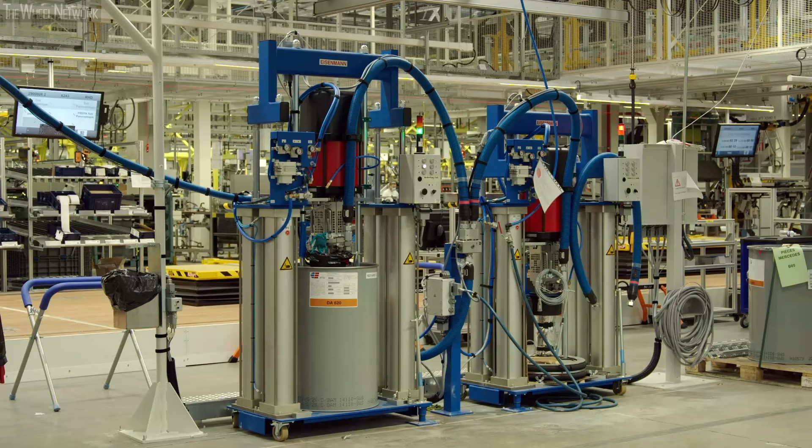In terms of quality control, what are you doing to make sure that Grenadier is fit for purpose and is going to be built to the reliability and quality standards that we as customers will expect? We have a very advanced, well-equipped quality department here with very experienced former Mercedes quality people. The focus is really based on the workstation, to make sure that before a vehicle goes from one zone to the next, the people working in that zone ensure the quality is correct — they don't pass on bad quality to the next station. We have 4 levels of quality: at the station itself, at the end of that particular line, before shipping out, and then we also have the audit process.

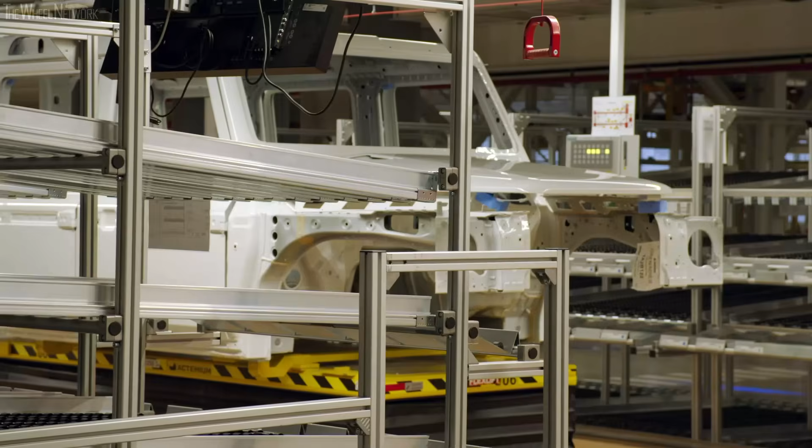So from where you're sitting right now, what are the big challenges coming up? So the next step is you build the 2Bs, which are not kind of production intent material — just to make sure the vehicle goes together, you learn how to build the vehicle from that. Then what we do is we go into the next phase, where we start to build prototypes using the actual production process. Then you ramp up the production up until the speed that you want to run it.

Listen, Eric, thank you very much for your time.

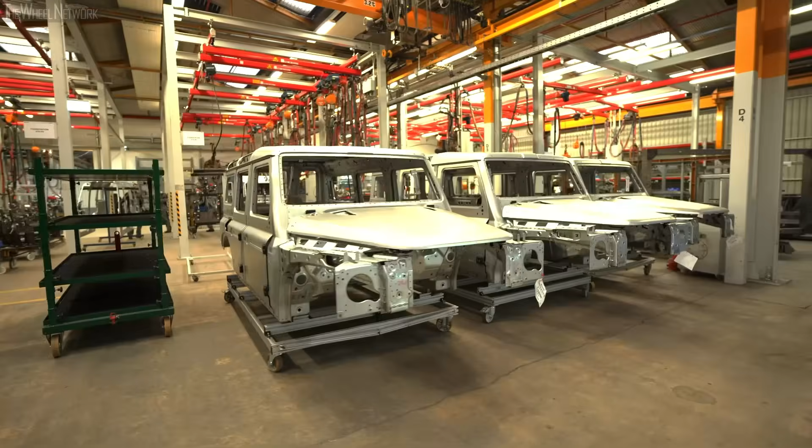Thank you, appreciate it. So the most advanced Grenadiers yet are now rolling off the prototype assembly line. And having taken over the existing high-tech factory in Hambach, Ineos engineers can now focus on refining the build process for mass production — some very big developments.

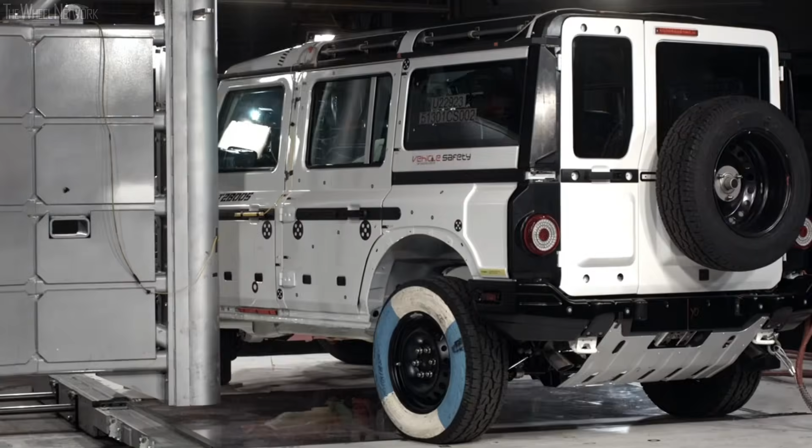Oliver, talk to me about 2B testing. Our main purpose at the beginning of the testing was really to validate our concept. You can develop something on the board and on the computer, but you really see for the first time when you're sitting in the vehicle, when you're crashing the vehicles, whether it really comes together like planned, like simulated. We are really satisfied with the results from our hardware testing until now — they are very close to our simulations, and that is always a good sign, because that is the starting point for further developments and improvements.

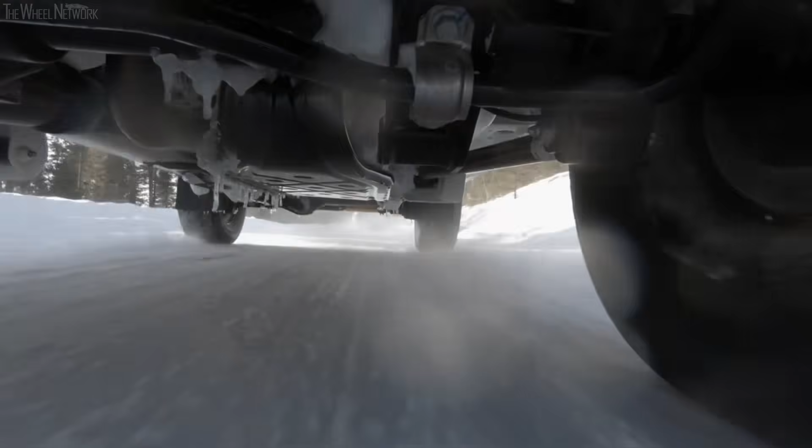The first part of the 2B testing programme has already been completed successfully. In Sweden, drivetrain and safety systems have been evaluated in sub-zero conditions on snow and ice. In the Alps, the Grenadier has been put through its paces at high altitude.

In terms of the whole package of field testing, the figure that's always been in my head is this 1.8 million kilometres of testing — is that on track? At the moment, all the testing is ongoing. We have a plan with the vehicles — they're running those kilometres, I would say, on-road and off-road. We have 1.8 million as a final goal, and we will ride more than 300,000 off-road kilometres out of that. Probably we are 20 to 25% through at the moment. Right now we started our rough road durability testing. We have our water tightness program, a corrosion protection program, and then we continue with our winter testing behind us, preparing now summer testing, preparing high-speed testing, and looking forward to the remaining program of the 2B vehicles.

Give me a sense of geographically where testing is going on. We're testing in more than 15 countries at the moment. We choose the countries with the most challenging environments. We will test in Austria, Germany, Italy, Spain, South Africa, Namibia, Sweden, Iceland, and the United States.

Has there been any learning from the testing, Oliver, that's fed back into the engineering and development teams that's actually made a difference to what customers will end up getting? Yeah, absolutely. If we talk about the crash tests, we've had very good results and we're able to improve the behavior of the airbags, which feeds back to our engineers so they keep improving on those topics. Early in our 2B program with our chassis tuning vehicles, we found that in regards of drivability and stability, we needed to adjust our axle geometry slightly. That carries through the whole vehicle, starting with the chassis, going through body-in-white, testing of interior, and everything is done to improve the maturity of the vehicle as we go into serial production and ultimately into the customer's hands.